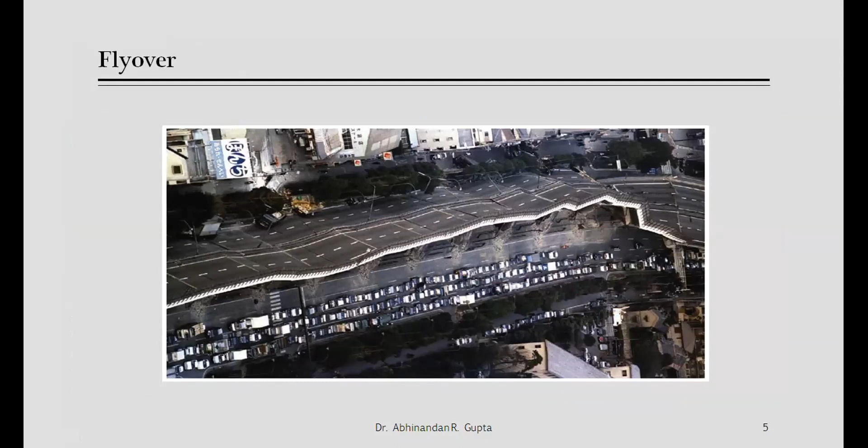This is one of the images available on Google also, showing complete collapse and turnover of a flyover because of the earthquake. This is again a picture of a bridge which shows multiple fractures and damage because of the earthquake.

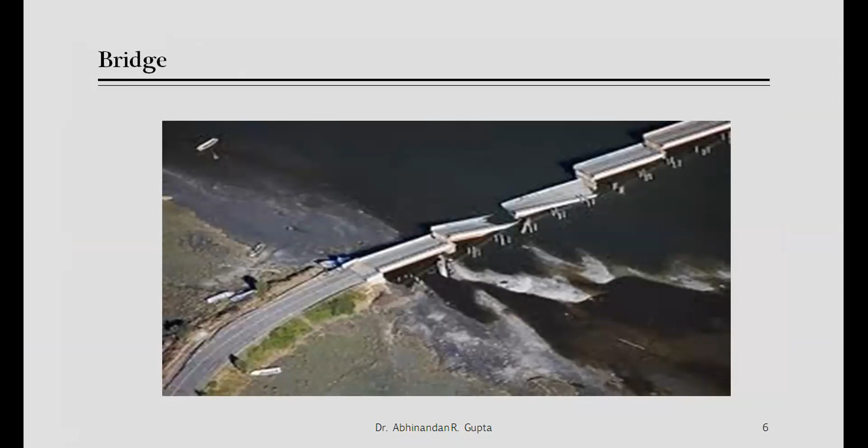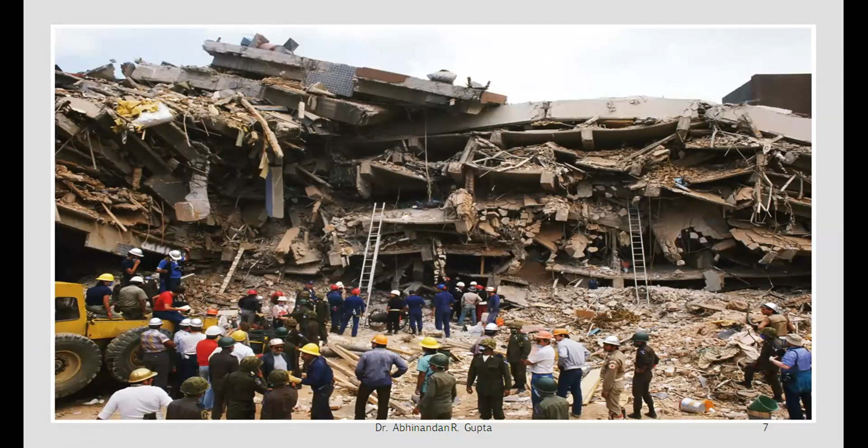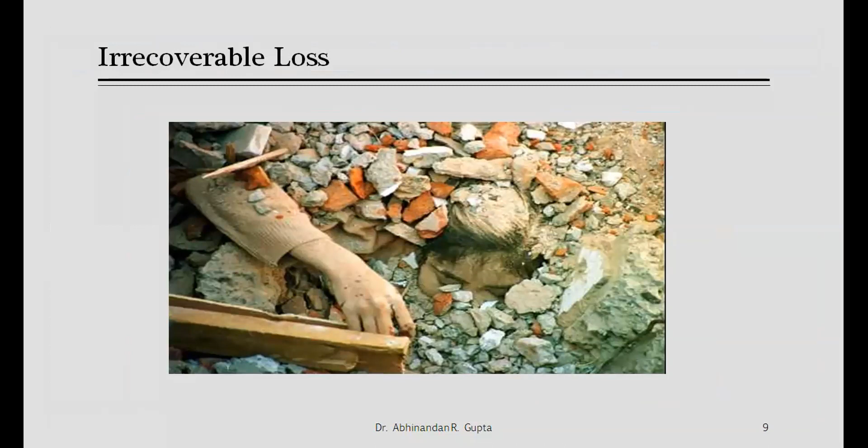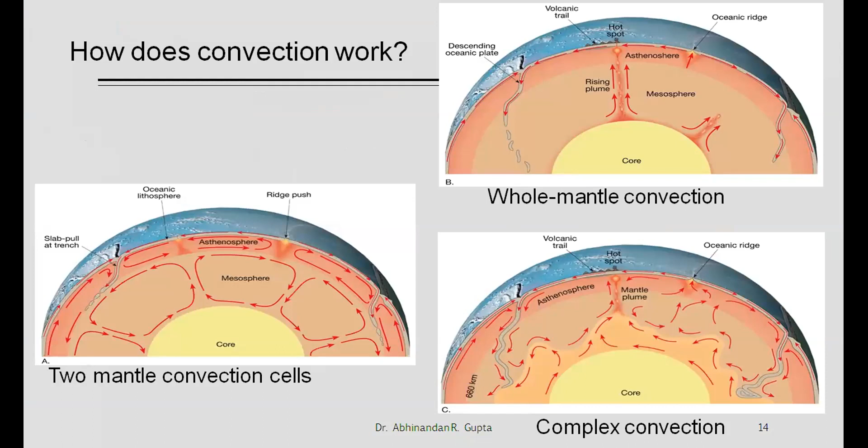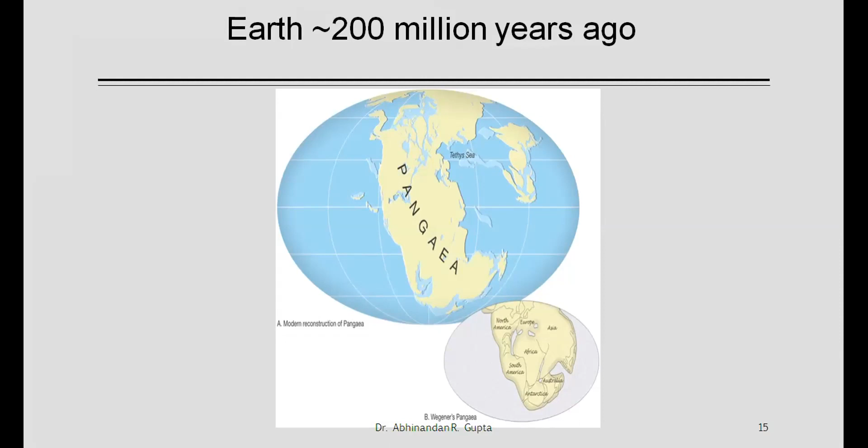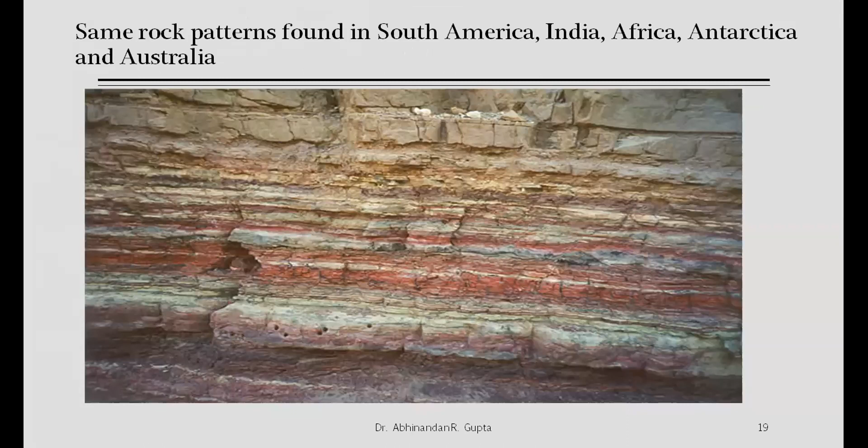So how much do we know about our planet? We will take a quick review that earthquake occurs because of the convection current, and there are supporting theories that justify why earthquake occurs. There are two theories: the plate tectonic theory, which says earthquake is because of the movement of tectonic plates, and the elastic rebound theory, which says earthquake occurs because of the occurrence of fault and release of strain energy in the form of seismic waves that causes vibration. So these are the two theories which justify the reason for earthquake. These were the detailed explanations that we are not going inside.

Now the earthquake occurs, as you all know, but it will take hardly a minute to explain. It can occur in three ways: when the tectonic plates, that means the surface of the earth, move apart from each other, or move towards each other, or move in parallel.

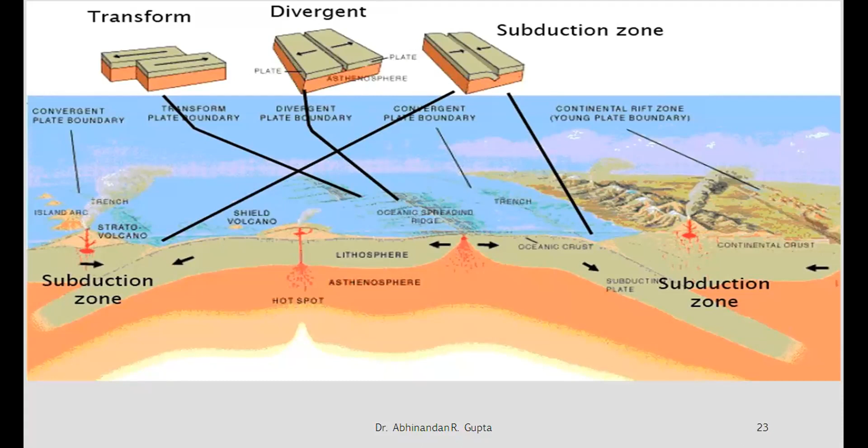Finally, the movement of the tectonic plates is responsible for the destruction. So these are the slides showing the volcanic eruptions and the development of the earthquake.

Now, the important thing we want to take out of this slide is that the earthquake occurs majority of the times on the boundaries. Boundaries of what? Of the tectonic plates. There are several tectonic plates that completely make the Earth's surface, and the earthquake is more felt at the boundaries of such tectonic plates.

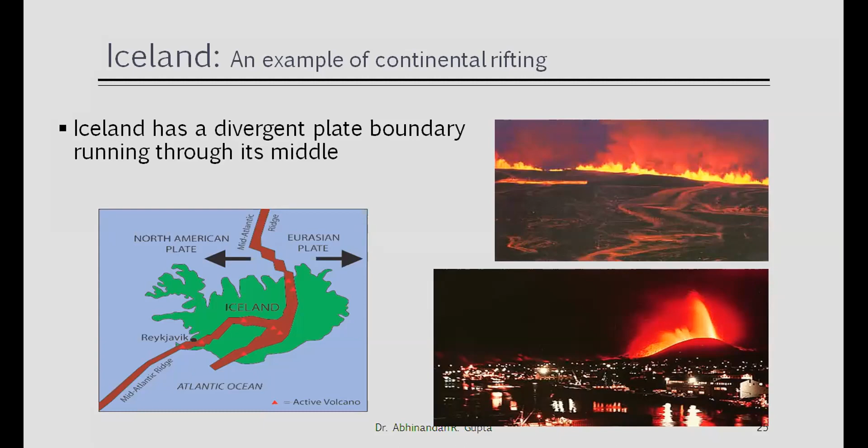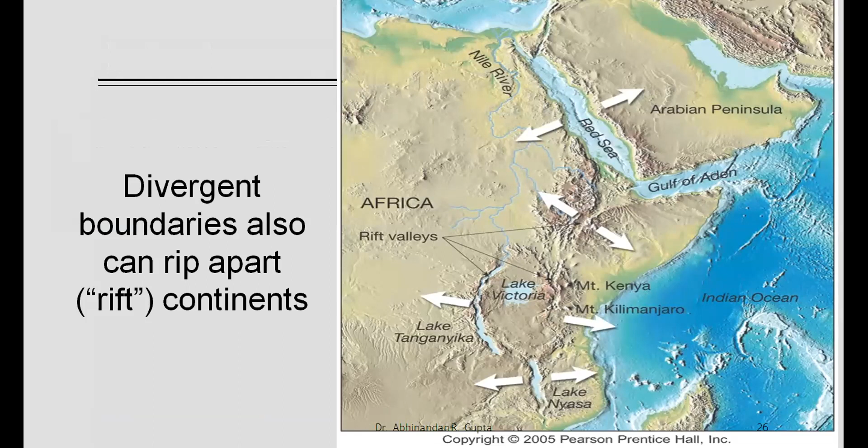Now you can see again in this picture there is the movement of the tectonic plates, and when the two plates move apart from each other, there is the development of the rift. One example of the earthquake because of the convergent boundary is the development of the Himalayan ranges.

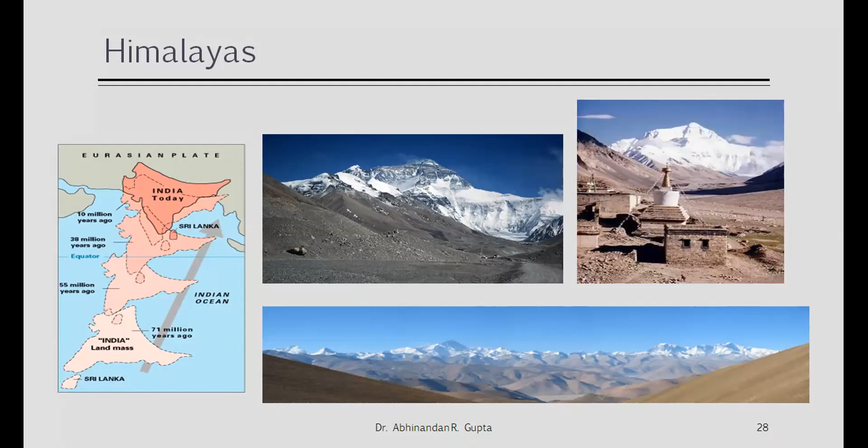So the reason for explaining all this is that we are going to study about the structures that are lying in the severe earthquake zones. So how do we make out which zones are severe? I have already cleared that the locations which are near the boundaries of the plates are more subjected to the earthquake disaster.

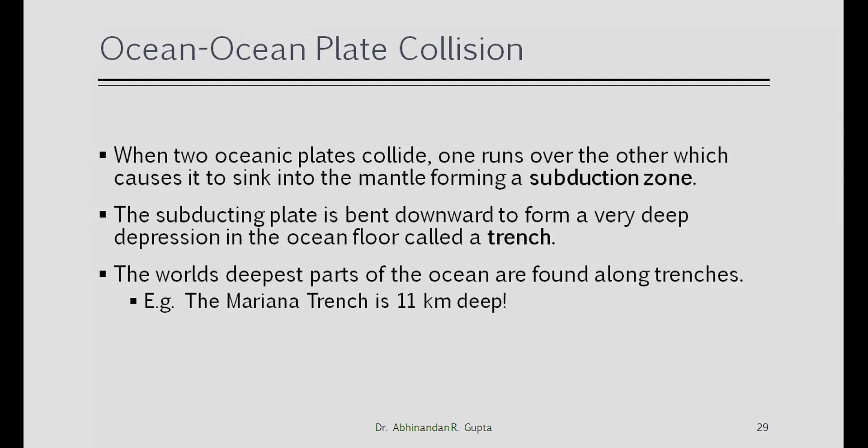As well as some of the locations where the bearing capacity of the soil and the underlying stratas is very weak, and which gets under the development of a fault, releases a strong amount of energy. So these are some of the reasons and explanations related to the earthquake.

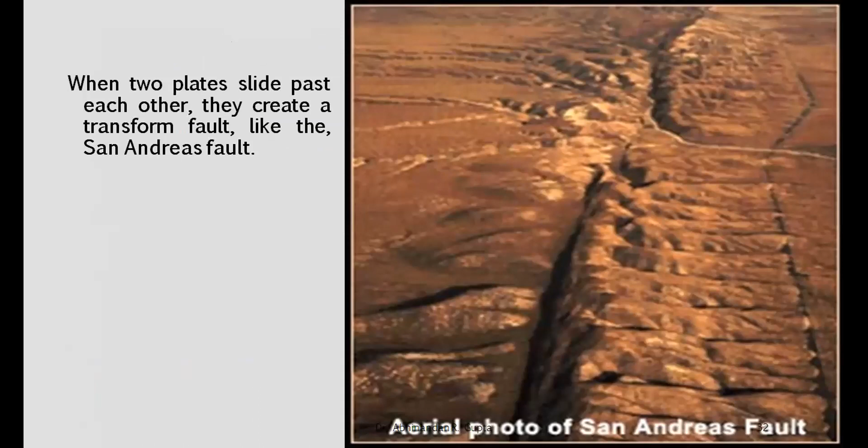These are some of the visible photos related to the development of the earthquake. And again, this shows the reason for the earthquake occurrence.

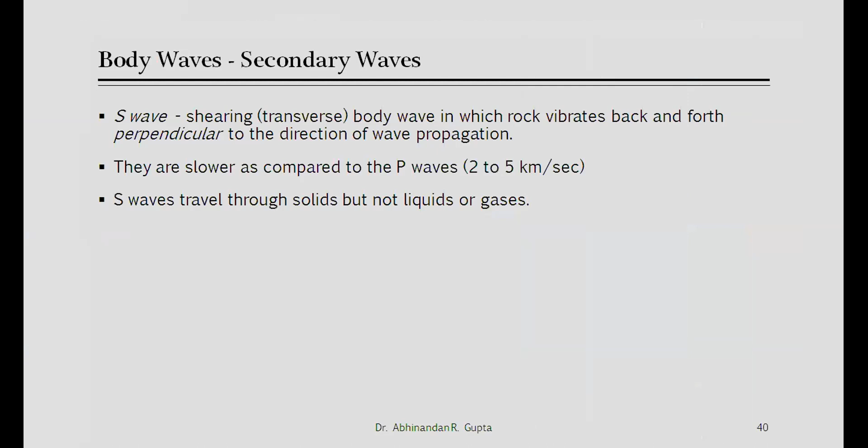Epicenter is a point which is lying at the surface of the ground, while focus is the point from where the earthquake originates. There are several types of waves: primary waves, secondary waves. Surface waves are again classified into Love and Rayleigh waves.

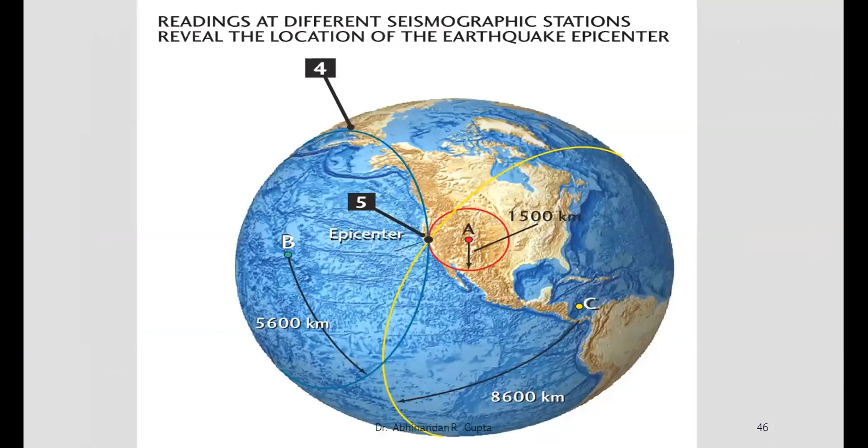So now we normally measure earthquakes in two parts. One is the qualitative approach, another is called the quantitative approach. The quantitative approach and the qualitative approach are justified by the use of intensity and magnitude.

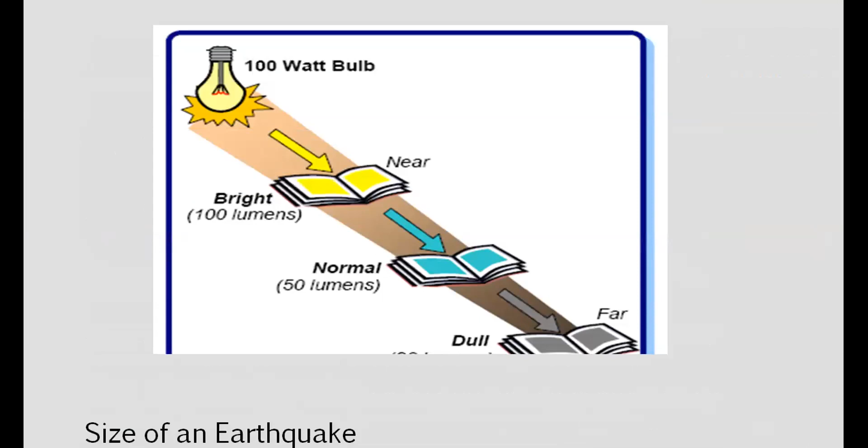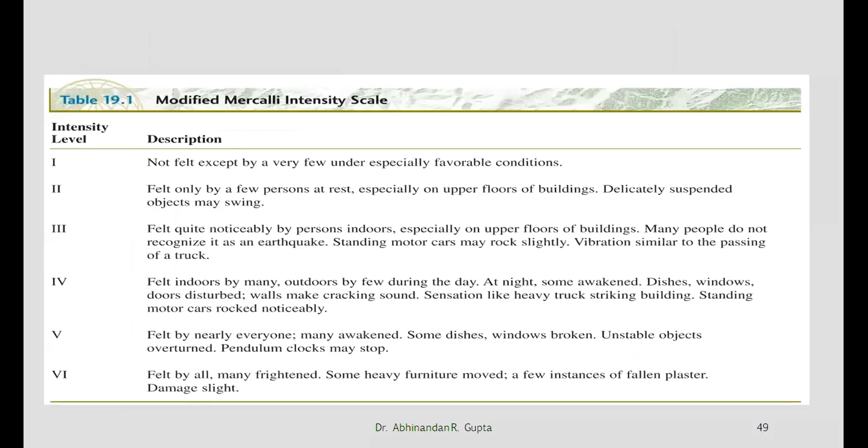So these are the intensity scales and everything. We are not going in depth of it.

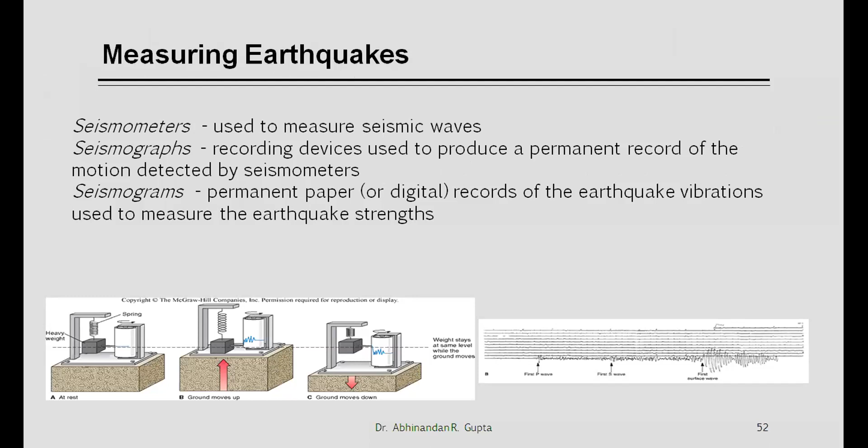This is the instrument which is utilized for measuring the earthquake, which is called a seismograph. Okay, now look at this map of India.

This is the seismic zoning map of India, and basically you can see that India is divided into 4 earthquake zones: Zone number 2, 3, 4, and 5.

Now again, some of the locations which are near the boundaries are more subjected to the earthquake, and that is highlighted by the red color, while the locations which are least affected by the forces of earthquake are highlighted by the blue color.

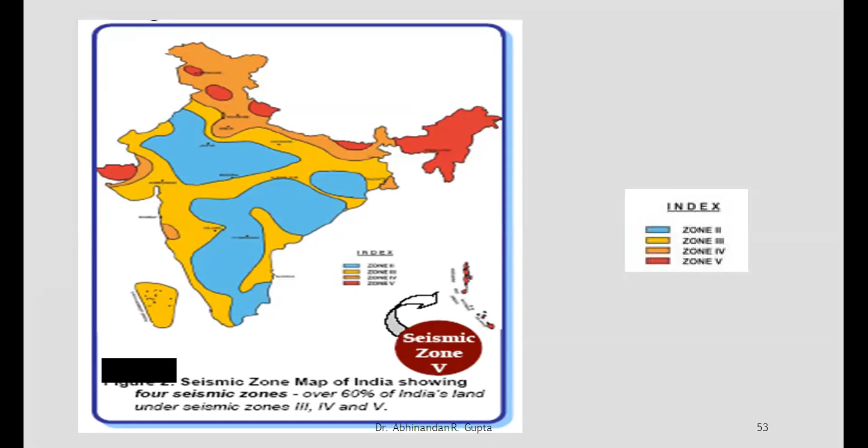So the Himalayan ranges portion you can see over here is most subjected and is lying in zone number 4 and zone number 5, which indicates that these places, these states, are more subjected to the earthquake. You will understand why I am focusing on these points later on with examples.

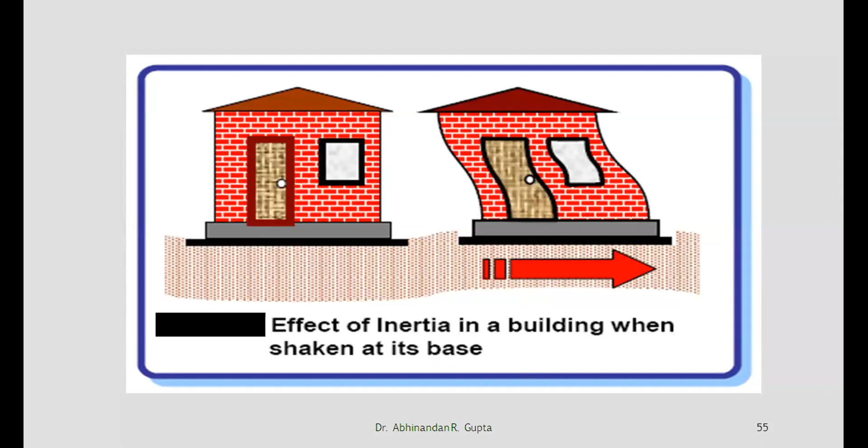Now, some of the logic being taught today related to the earthquake is that the body always remains in its own position. It tries to provide resistance against the changing state. So this resistance which is provided by the body against the changing state is called inertia.

But finally, we should realize that inertia is a type of force. And when we talk about inertia, force is nothing but mass into acceleration. Mass into acceleration. Now, when the movement of the particles in the ground takes place, that means when the seismic waves are generated, we cannot control the acceleration of the ground.

So what is in our hand is the mass of the structure. So if we try to change the value of the mass, definitely we can change the impact of the force which is coming on the structure.

And from that, we have taken the part that if you reduce the mass of the structure, the force acting on the structure will also reduce, and at the same time, the impact will also reduce. So it is being taught that lightweight material should be utilized for the construction against earthquakes. Okay, moving ahead.

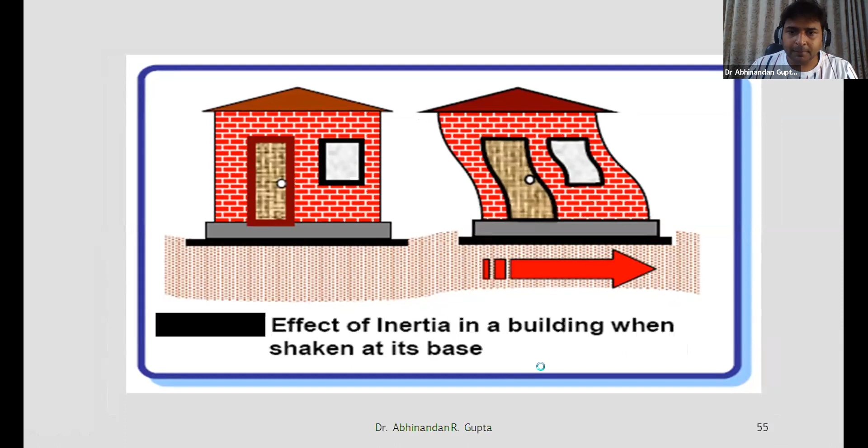One of the other learnings we can take from this slide is that the inertia force acts in the opposite direction to the acceleration that is being developed in the ground.

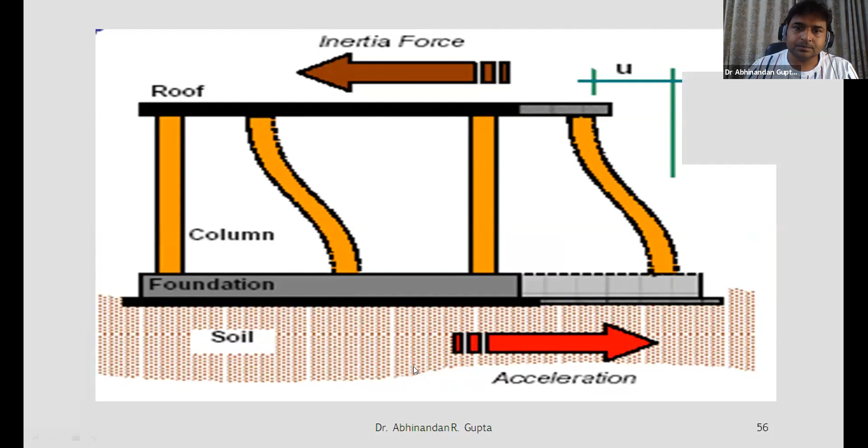We all know that the movement of the Earth's surface can take place in any direction, horizontal or vertical, but we design structures for gravitational force, which acts in the downward direction. So the resistivity of the structure against the vertical direction is more. However, when we don't make structures earthquake resistive, the resistivity in the horizontal, that is, lateral direction, is lacking. So we take efforts to increase the lateral resistivity of the structures, in the horizontal direction.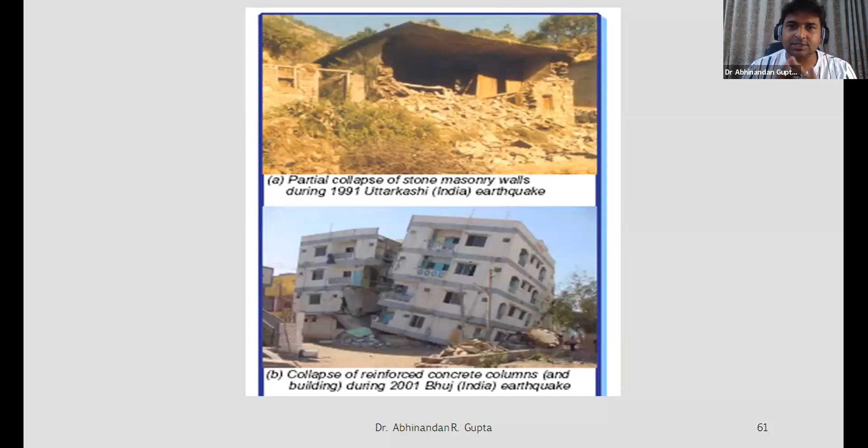I again focus that in the next section we will discuss what we have learned and what the ancestors did. So important things: first, we learned that we should use lightweight material. Second, we are learning that we should go to frame structures and not load bearing structures.

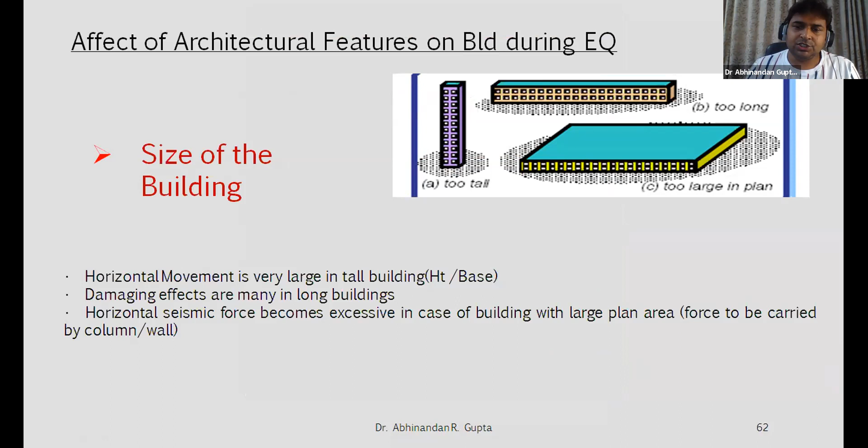Now, related to the shape of the structure, there is detail given about the shape, that the structure should be of a proper geometrical shape such that the diagonal member should pass through the center line of the structures. Again, we will not go into the depth of this.

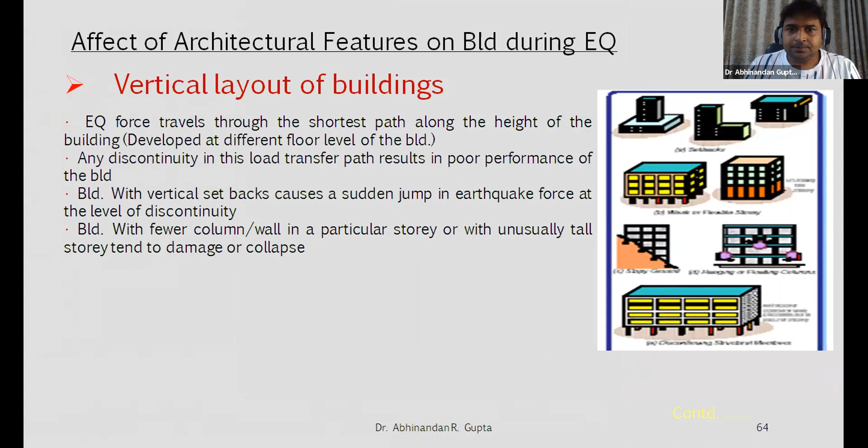Now, these are concepts related to twisting forces, why these forces develop. We have been taught that if the load is concentrated in one section, that means at a particular location of the building, there is the development of torsional or twisting forces.

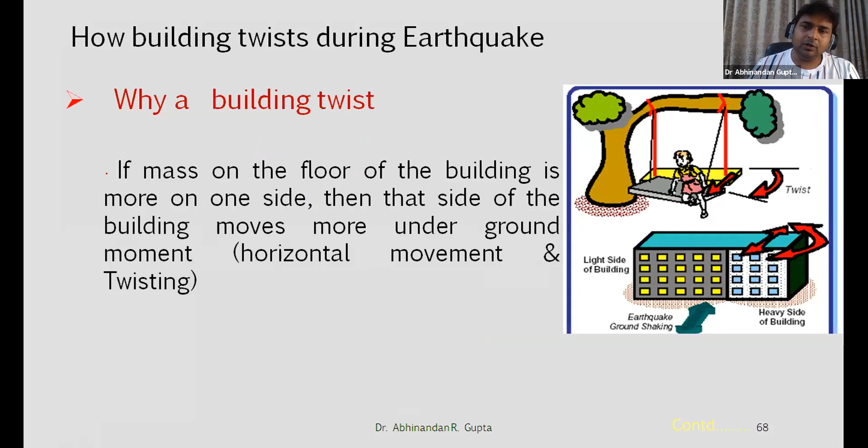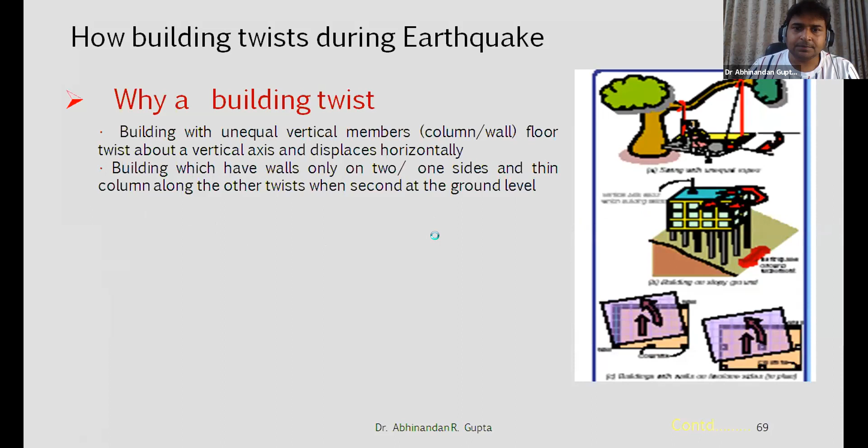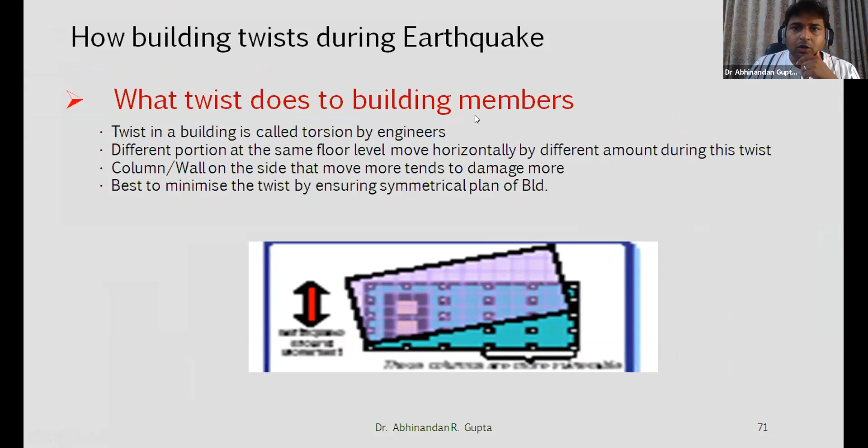Very brilliant examples are given by various agencies, including renowned institutes like IITs. We have learned that the size of the columns should be equal, and the columns should be stronger. Normally columns are not provided stronger compared to the beams, but columns should be stronger than the beams. We have learned that the load transfer path is from slab to beams, from beams to columns, and from columns to the footing up to the dispersion area, which means the joints should be very strong to transmit the load.

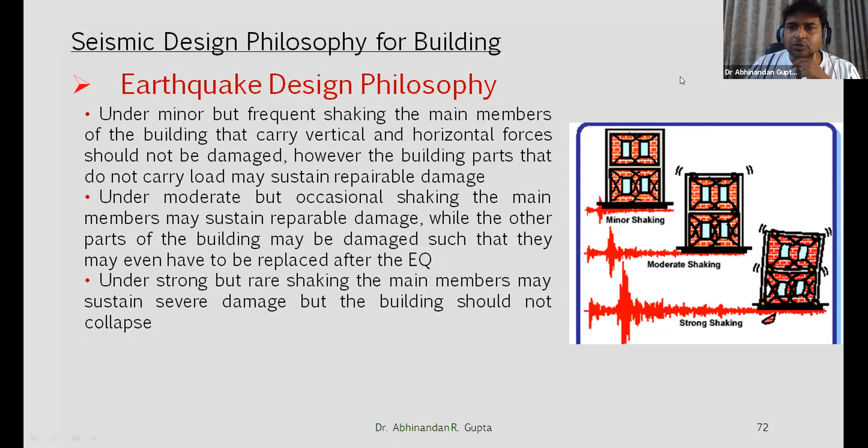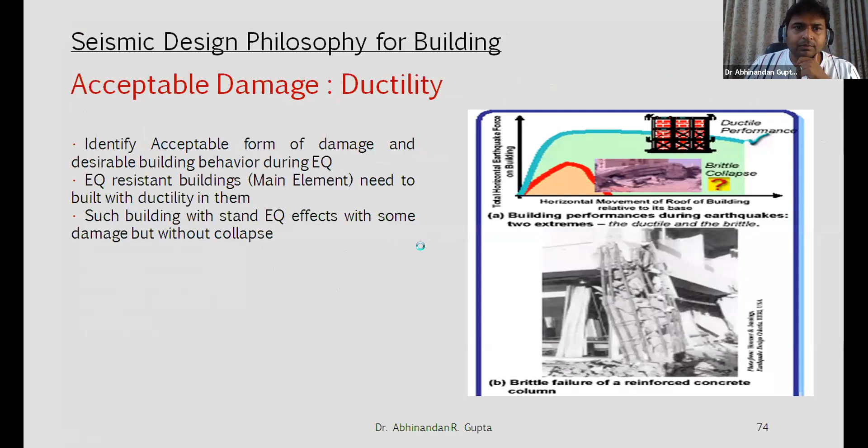So this is the concept which we are adopting, that the column should be stronger. But irrespective of the figure shown, I want to tell you there is no such concept as using a weak beam. Appropriate load bearing beams, appropriate resistive beams with the strong column should be provided.

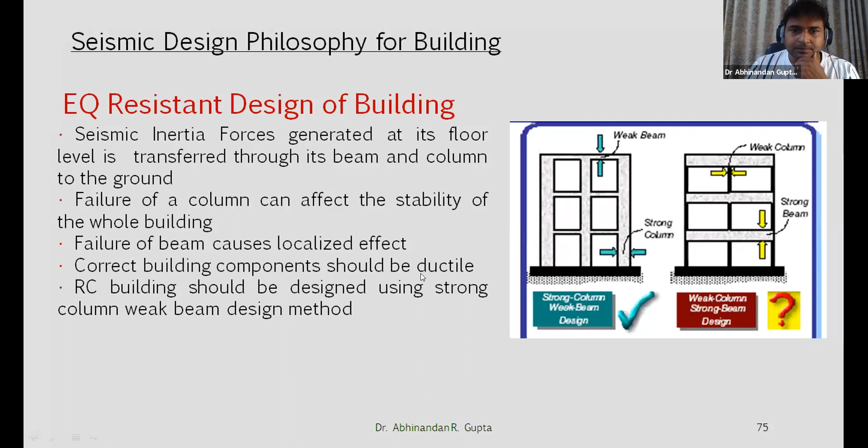Now this is how the structure behaves when the earthquake occurs. Again, this is an important part, because we have learned that the earthquake causes shearing to the structure, and when shearing occurs, the force or impact of the shearing changes with the height.

According to the codal provisions, we consider live load to be zero at the top surface. So when we carry out calculations for the story shear, we find that normally at the terrace the story shear value is less, and it is more at the next story level, like the top second or third floor, maybe because the total amount of story force is more at that location. The maximum shear is at that level, while the base story shear at the bottom floors is reducingly less.

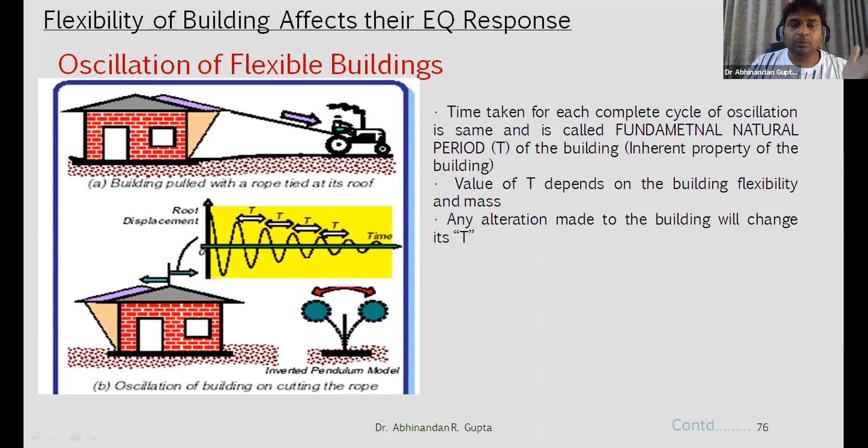This causes the oscillation of the structure also. That means the structure needs to be somewhat flexible, and we should keep the balance - we should not make the structure too flexible, because that will subject it to more oscillation, which will cause vibration and damage.

We have learned that the walls should be such that they should not topple down because of earthquake lateral force direction. We should provide the horizontal band - this is again one of the important learnings.

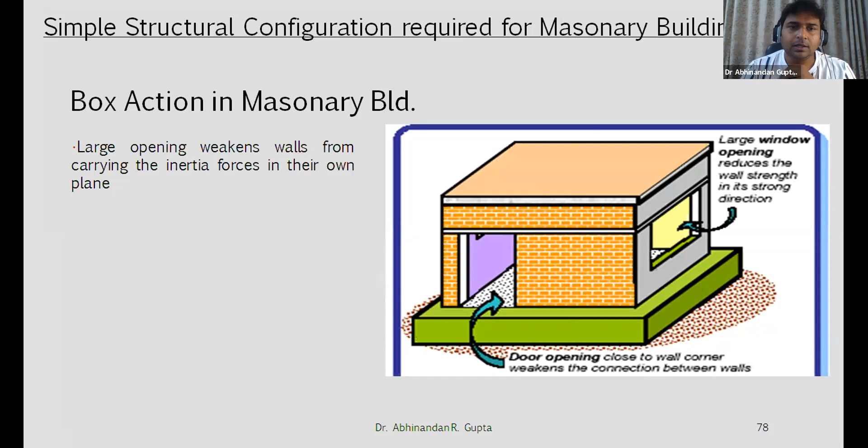What are bands? These are the frames that are provided at various particular locations. These locations, where these frames are provided, work to integrate the structure all together, and it transmits the load from one end to the other, making the structure a whole and integrated. So the final learning is that we should provide various bands.

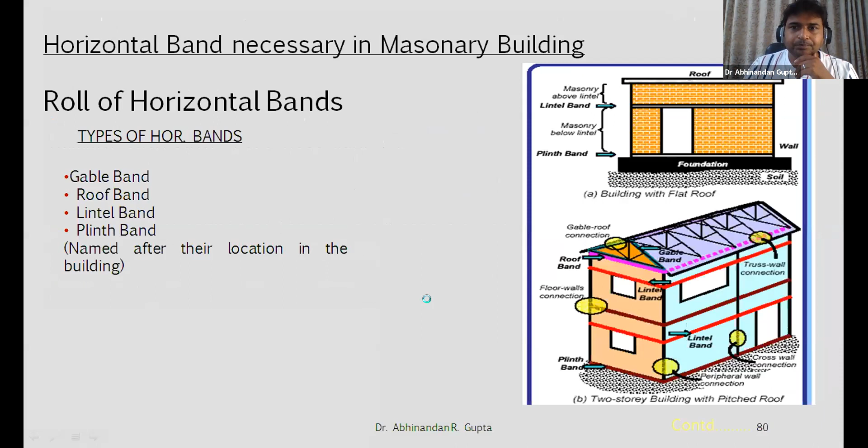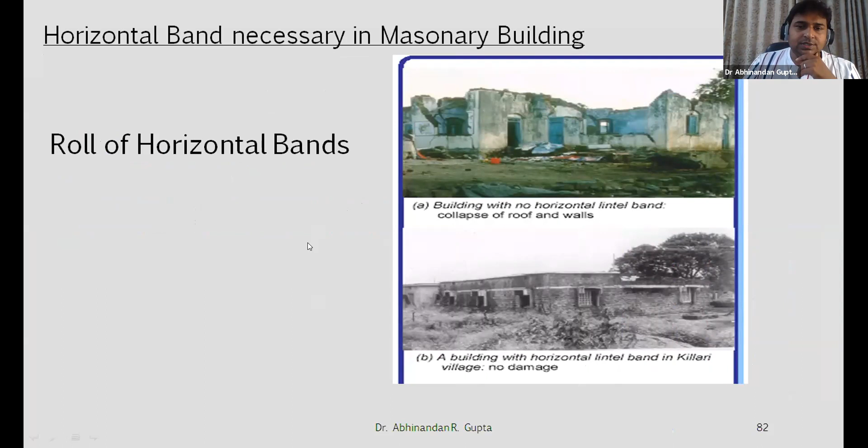Again, the structure shows how reinforcement can help. Now what we have learned from this is that we should go for frame structures as compared to load bearing structures, and we should use lightweight materials.

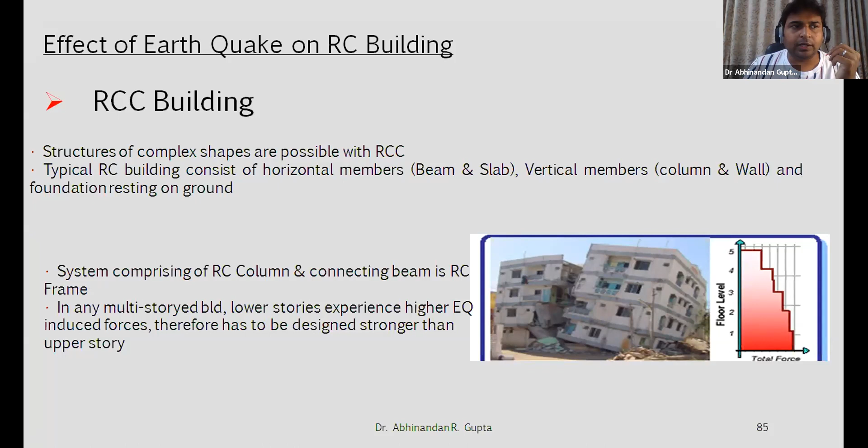Just for the next section, please keep in mind what learnings we are getting. We should provide bands, we should use material with high ductile property, and thus increase the amount of reinforcement in the RCC. We should provide strong columns.

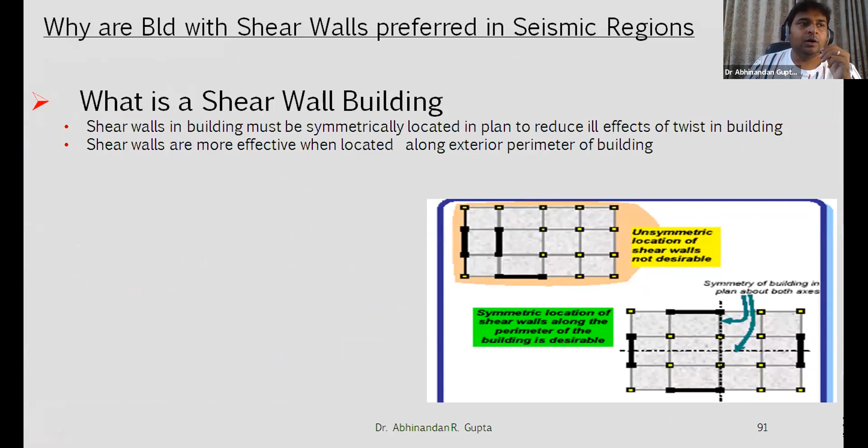Shear forces are developed, which act from the horizontal direction, and thus we provide some mechanisms - I won't call them recent, but there are some mechanisms that we use nowadays. Let's look at these mechanisms.

Some are called base isolators. The work of the base isolator is to isolate the structure from the bottom, so that if there is movement within the ground surface, that displacement should not get completely transferred to the upper structure. So we provide a cushion over there, a type of damper which absorbs the forces and even allows the displacement to some extent, like a roller. These are the base isolator technique, which is not seen by the majority of people as of now.

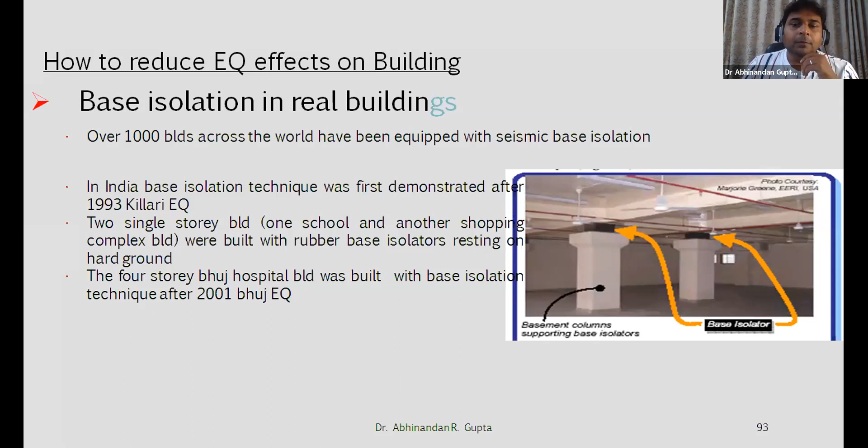Practically, we haven't seen that type of provision in structures commonly - even such dampers are not seen in majority of structures for common people. What are the dampers? They are placed in the diagonal sections, which absorb the energy, and this energy is absorbed and not transmitted to the other end - thus it acts as a shock absorber.

So these are the recent tools that are being adopted and suggested for making the structure earthquake resistive. Now these are some of the codes from where we take the data and do the calculations and all.

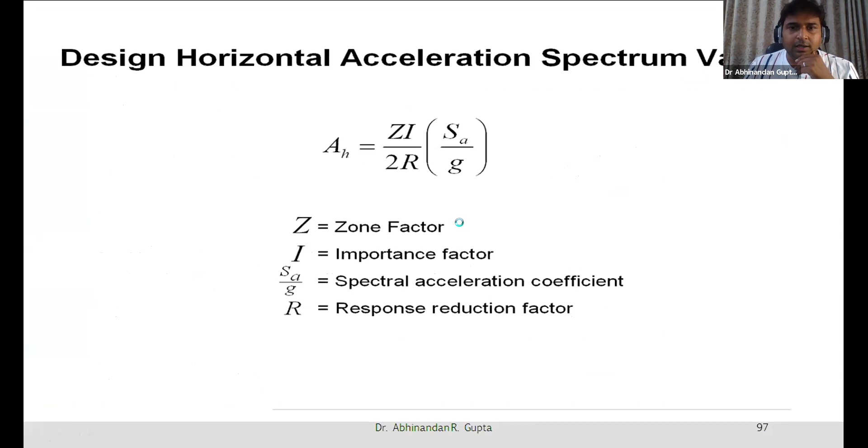Now we have completed one part, and in this part we have given emphasis on what we are learning nowadays, what we are being taught in the book currently. Now we will start with another part, and this part is related to the ancient structures.

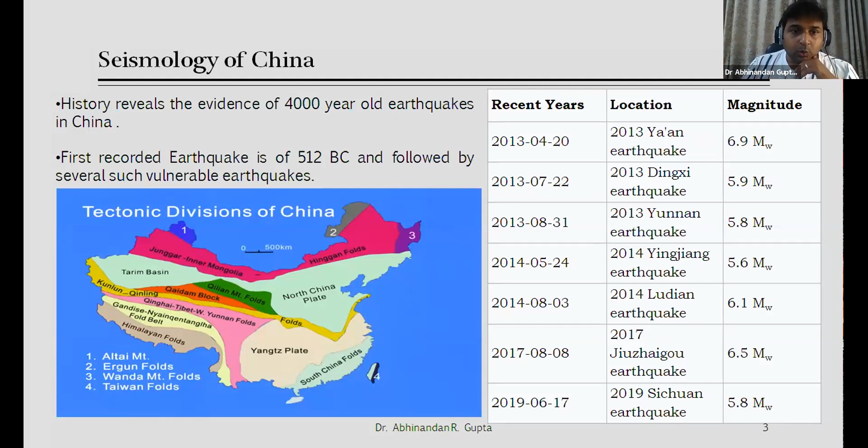Now we are talking about this particular city called the Forbidden City. The record says this city is 600 years old and it has witnessed around 200 major earthquakes. It is not a joke - even one major earthquake leads to complete collapse. So it is such a big part of learning that this city has witnessed 200 major earthquakes, of magnitude around 7.8.

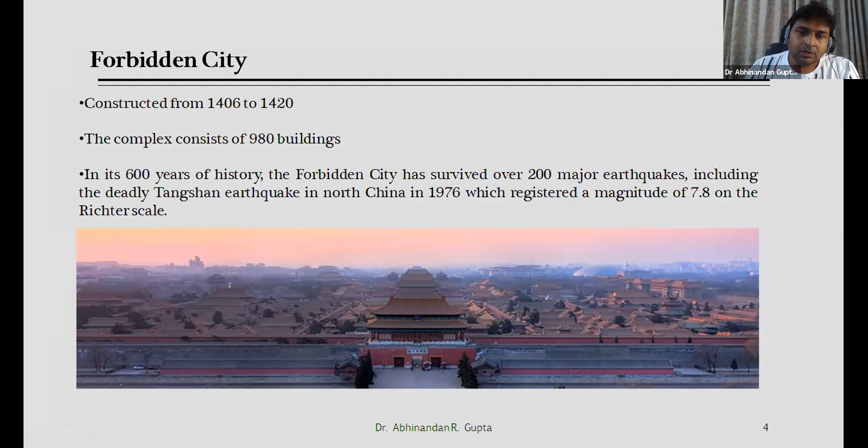Now we will concentrate on what Dougong means. This is the technique which made this country, this city, these structures resist and stand till now. So this is the technique which is called Dougong.

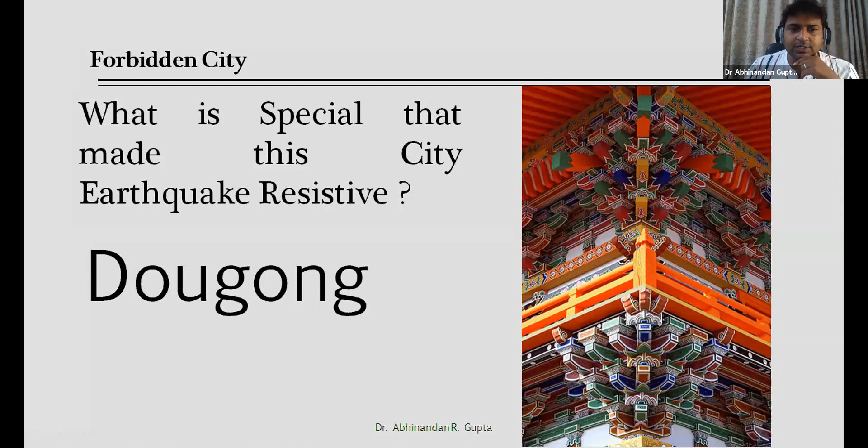Now where it is used, basically the Dougong is used in the pagoda. Pagoda means the structure or the stupas which are provided, and these structures are very tall in nature. These complete structures are basically made up of timber, and one important thing we should learn about this structure is that these complete structures are very tall in nature and made up of timber.

Nowadays we say that timber is subjected to rupture. Even we teach students that timber is subjected to rupture, and we prefer RCC more as compared to timber.

But over here you can see that complete structures of 4-story, 5-story, 7-story, even some pagoda stupas of 11 stories are still existing. They have not gone to utilize any other material for fixing. So the first principle they utilize is that the connectivity should be made from the same material. They are not utilizing iron nails. They have gone to construct the complete structure with one and the same material to increase the homogeneity.

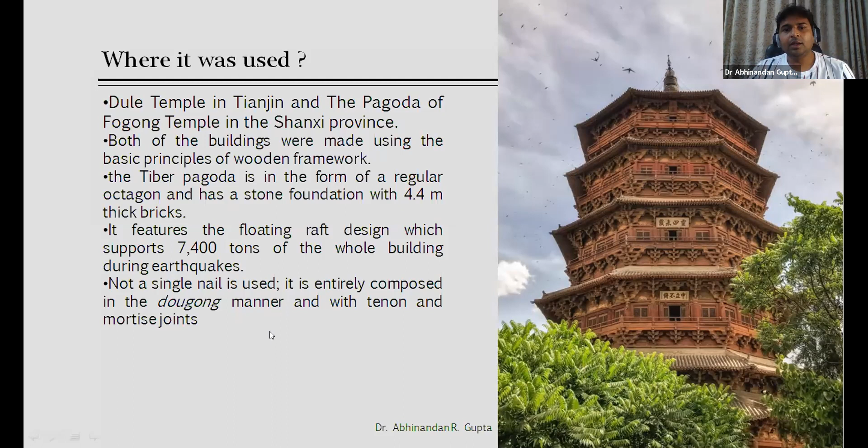Now we will discuss what this Dougong is. Basically, Dougong is a unique interlocking system between the framework.

There are columns and beams, so for interlocking between the columns and beams, just as nowadays we use reinforcement bars for the connectivity of beams and columns, they have utilized a particular specific type of support which is called Dougong.

Now this particular method is very unique and very simple. How brilliantly they have designed it only with the material timber, which allows displacement in any horizontal direction without failure.

So Dougong is a series of interlocking wooden brackets used to support the overhanging roof. It has the form of a floating raft foundation on which the building floats, which means it separates the structure from the ground surface.

As if you are keeping a particular table or chair on the ground, it is not fixed on the ground. Second important learning: the structures are not fixed with the foundations to transmit the load. This is contrary to what we learn nowadays, that providing a raft foundation increases the dispersion area, and more dispersion area means more stable the structure. We are going on the contrary here. According to these studies, they have not created foundations; the structures are kept separated from the ground.

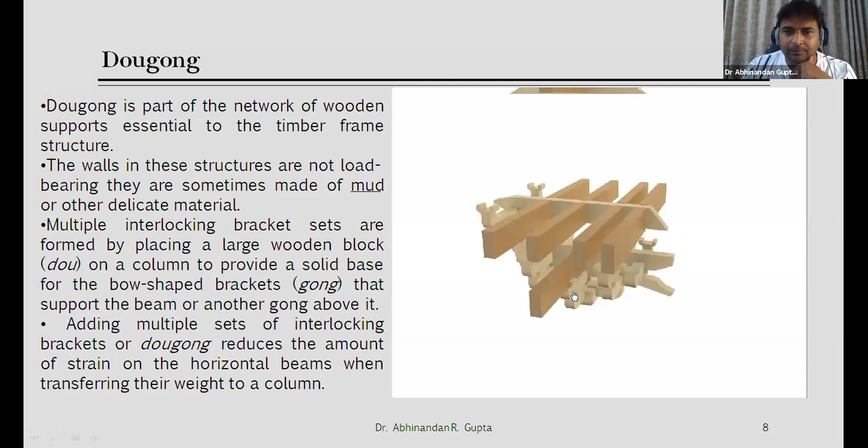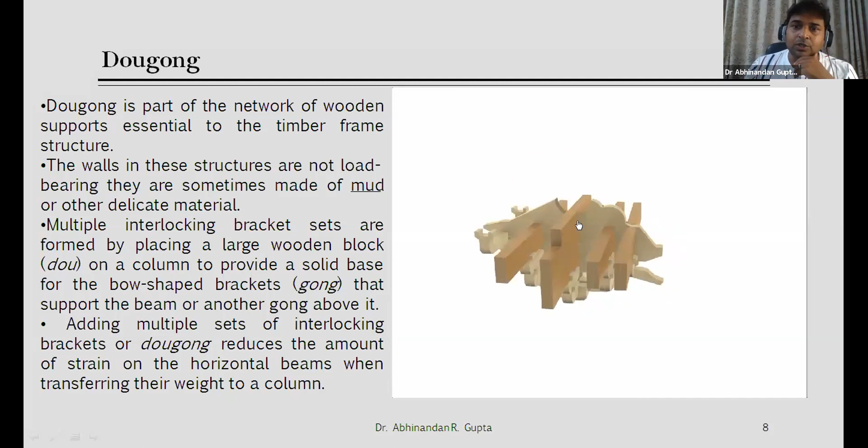See, this is Gong, and one above the other, this complete structure is made. I will repeat it so you can see it minutely, because the further discussion will be based on it. This one is having 5 slots, this one is having 6 slots, and this number of slots increases up to the top. Now, when you see at the top, there is only one arch for resting the beam.

I have gone through some of the recent papers that are now being studied in the IITs. However, there is some wonderful experimentation work which was done in China, and it was done around a decade earlier. They had done all this experimentation on the structures quite early.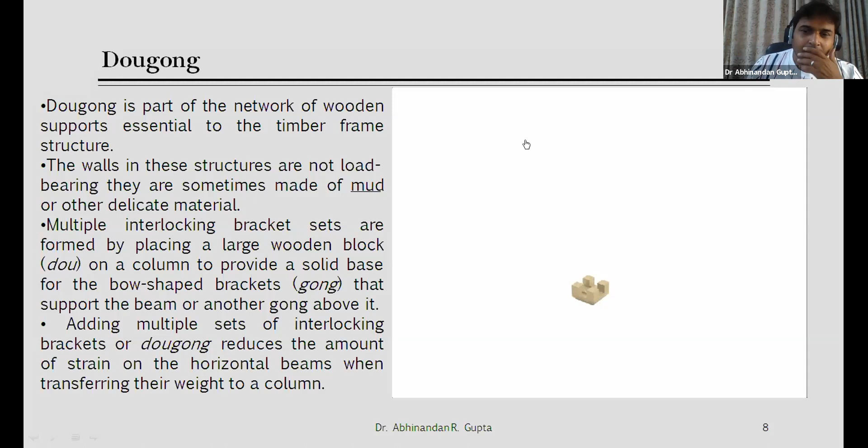Now this is the video. I guess the sound will not be audible because it will be played through the system, but still I will play this video. It is a complete experimentation work, a short video of 2 minutes, which will show you how efficient this dougong structure is to the earthquake. I will just tell you in brief.

The set of experimentation is made. The structure is made in a particular lab. It is placed on the shaking table, and this structure consists of the gong, the support that we have discussed, and it is subjected to a magnitude of 10. It is out of our imagination that it is subjected to magnitude 10, and even after that subjection to high seismic forces, the structure did not collapse. Okay, so I will just play the video now.

Sir, while playing the video, is voice coming or not? Video playing, is it coming? As of now, I will just play it. Kindly let me know if the voice is there. But the video was stopped now. No, I have paused it to just ask whether the voice of the video is coming or not. Please start.

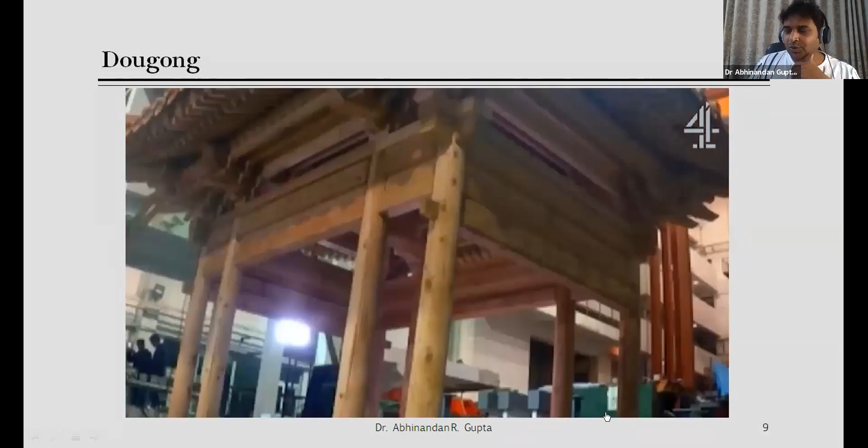So this is being shown here, that even at magnitude 10, this complete structure is stable on the earthquake shaking table, and this was a quite brilliant example of the experimentation work of such an ancient technique.

The only special thing in this structure is the presence of the gong, one of the priority elements. Apart from that, another important thing in the structure is that the complete structure is made homogeneously, entirely of timber, with no fixation of any other type of material.

The third important thing we have learned from the structure is that to make it earthquake resistive, they did not fix the structure to the ground. They kept the structure isolated from the ground simply by not providing foundations. They did not think of providing a support like a base isolator, but they simply eliminated that particular element, the foundation itself.

And they made such a stable top surface that even at the time of the movement or the inertia that develops, this force moves in the opposite direction. It takes advantage of the timber's flexibility, moving in the opposite direction at the time of forces, which keeps the structure stable at its own position.

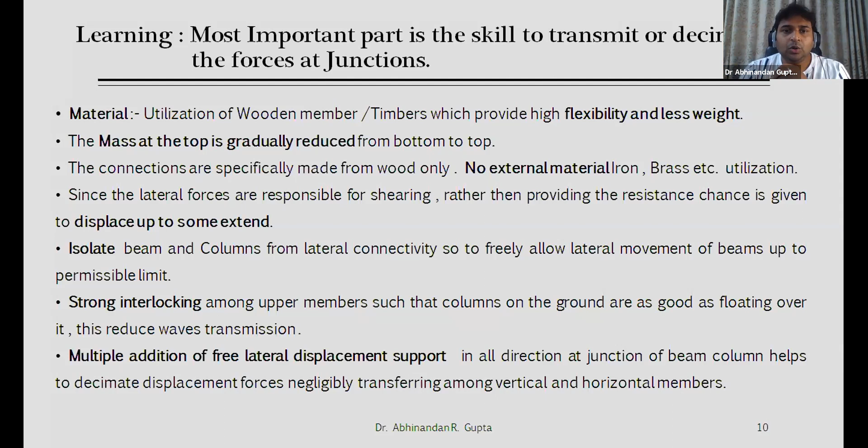Further, we will now discuss another technique which is called Shinbashira of the pagoda.

Sir, will it be okay to take a 5 minute break for this? Yes, sir, we will start. What time should we start, sir? Actually, the second session starts at 11. Okay, but continue for 15 minutes, then we will take the break. Yeah, that will do, and then we will again start the session at 11. Okay, will do. We will continue with this technique.

Now, again, the word Shinbashira has its origin from Sanskrit, and as I told you, with the passage of time, technologies, methods, and religious concepts also transmitted to various regions of the world. So this is again one of the techniques and technologies transmitted from India thousands of years earlier.

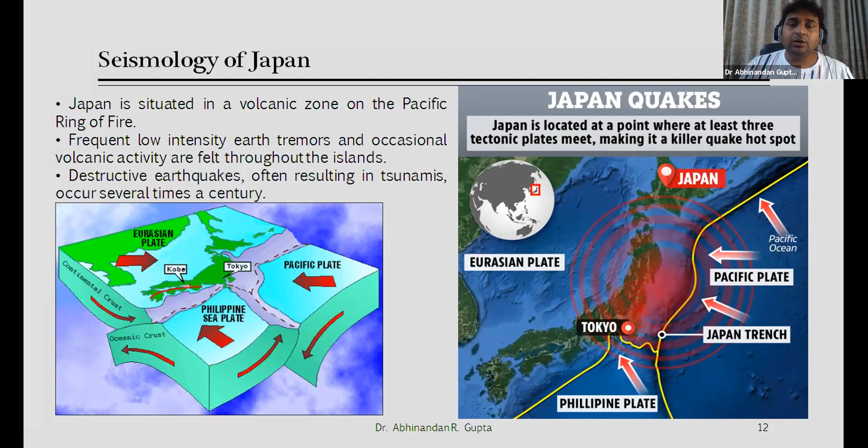So this is the case study that we have taken. This is the Horyuji temple, located in Japan. It is built in 607 AD. It is 122 feet tall. I repeat, the structure is 122 feet tall. So this is the world's oldest wooden structure, which is around 1410 years old.

It is lying in a country which is highly subjected to earthquake forces, and still this structure is existing. It has witnessed many more earthquake forces of high magnitude.

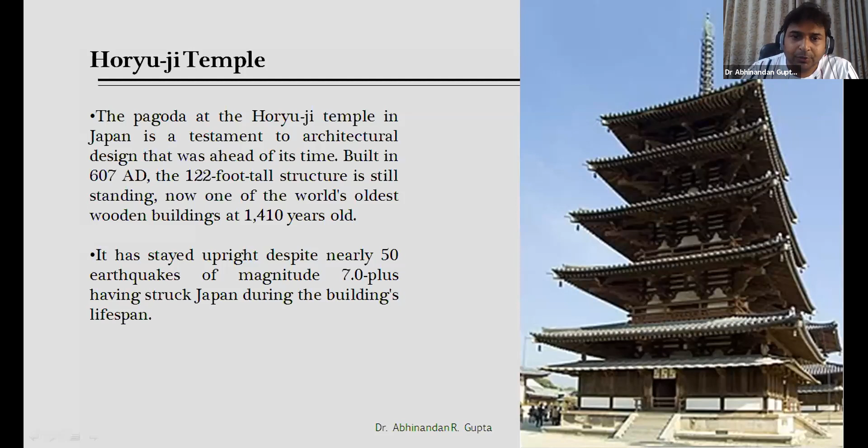Now, Shinbashira is what? It is the central monolithic column which is provided in the structure. You can see in this structure, this is the central column which is called Shinbashira. This is the central column which is erected from bottom to top, and is continuous in nature. Apart from that, what is important is that this is made up of timber. Again, this structure is made up of timber.

All these stories, 1st, 2nd, 3rd, 4th, and 5th, are constructed such that they are acting like boxes one above the other. So suppose we consider wooden blocks 1, 2, 3, and 4. We have inserted a particular rod inside it from the center, and now when movement takes place, the boxes will move one above the other but will not fall down because of the central supporting column, similar to our spinal cord, the spine we are having. So in a similar way, they have provided the central monolithic column which is called Shinbashira.

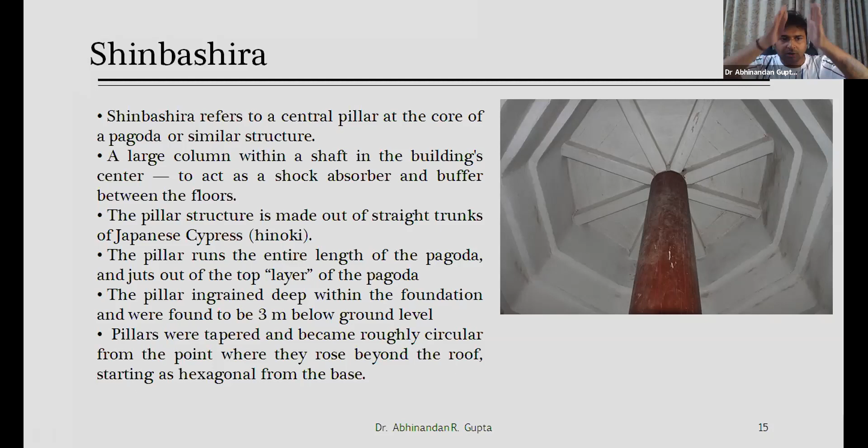They have made the strong base at the bottom, and then the structure is created in such a way that the dimension of the stories reduces from bottom to top. So it is somewhat similar to the pyramid, because they have reduced the dimension from bottom to top. This is how they maintain the center of gravity and the stability of the structure.

When you go through the various stability analysis of the geometrical shape of the structure, you will find that the prism or the tetrahedron is having much more stability against overturning, because the weight is concentrated more at the bottom and less weight is concentrated at the top. And since it is symmetrical, more stability is achieved when the structure has a pyramidical shape.

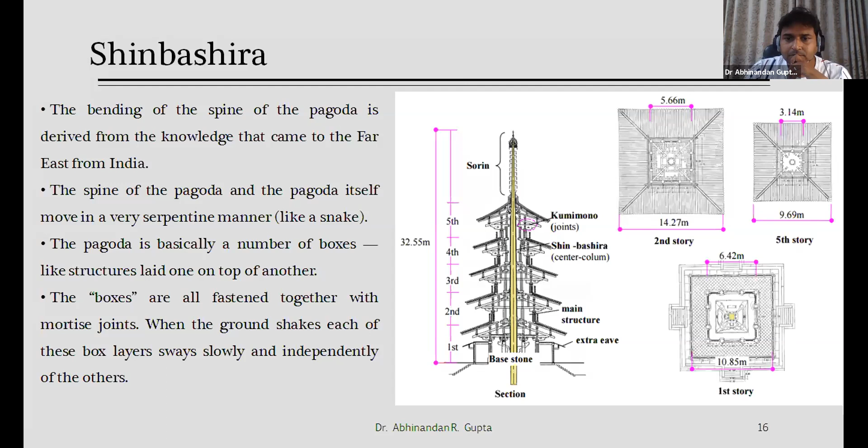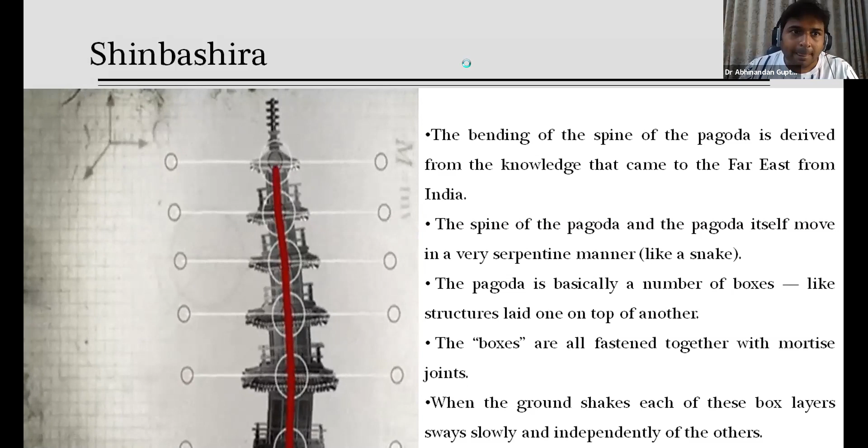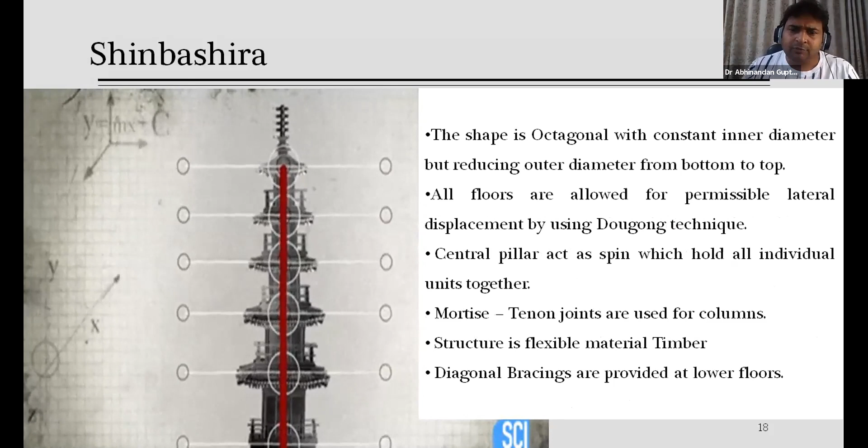Now to increase the support, they have provided diagonal bracing at the lower section. So yes, the present researchers of some 50 and 100 years did not find out the concept of bracings and all this. These were developed much earlier by the ancestors, and we are just re-utilizing some of the concepts, ignoring the important things that they developed.

So the learnings we can take from this Shinbashira are: we need to reduce the mass at the upper section, we need to allow lateral displacement to the permissible limit, we should not try to rigidly fix the lateral forces, we should allow them to some extent, and we should provide a central holding mechanism which should hold the structure in integration.

The center member should be fixed firmly to the ground. No other material should be utilized. Even now, they have not utilized any other material. They have gone with the same material, that is timber.

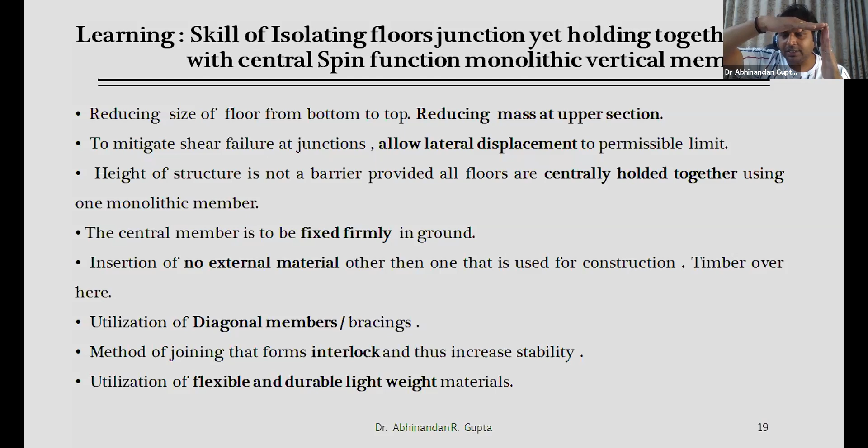We should use diagonal members for transmitting the load. It's common sense that if there are two members and forces are coming on a particular joint, the forces get transmitted into two members. But if there are three members, meaning a diagonal member is also inserted, the same force will also be carried to some extent by the diagonal member. The total forces will be transmitted to three different locations, and thus it will not create impact on a particular point. So the role of diagonal members is very important.

Since they have created separate floors and provided joints like dougongs, they have given importance to interlocking. They have given importance to interlocking, and to the utilization of flexible, durable, lightweight materials like timber.